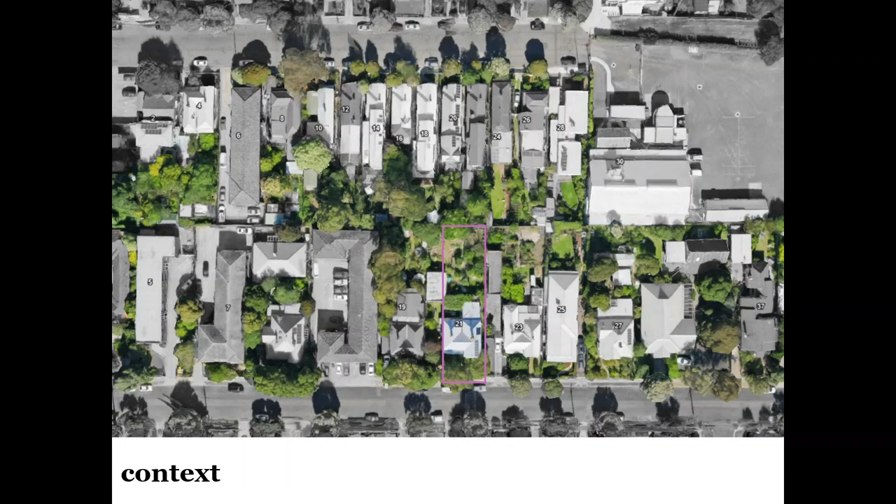Context again, suburban house in Northcote, where you can see site coverage is actually still quite low in comparison, and it has this quite lush green band running through the backyards, which we certainly wanted our design to integrate with. So again, I'm going to talk about these things, but not in that order.

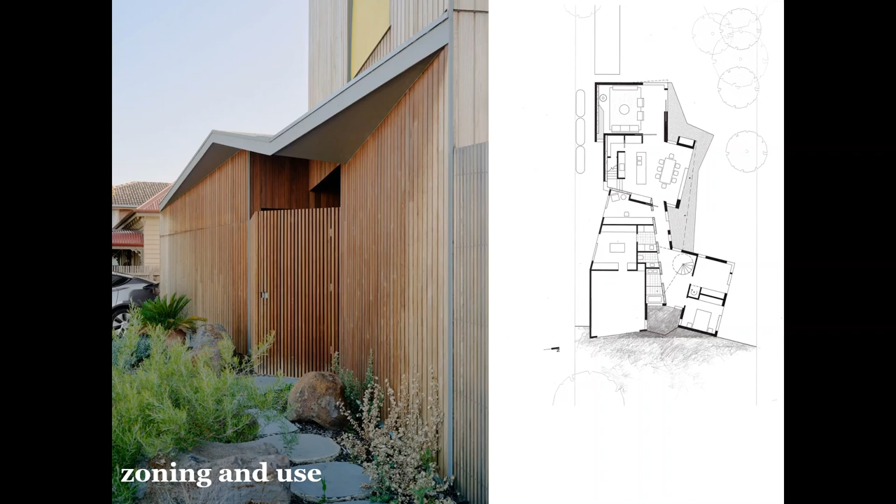So as you arrive, this is the main entrance. There is an outside lobby before the front door where you park your bikes, and that feeds a little bit into behavior. If your bike's outside your front door, you're probably more likely to use it. If it's in the back shed, you think, no, it's too far, take the car. So that's the idea. And then you enter through a double height lobby, which also works as a thermal chimney.

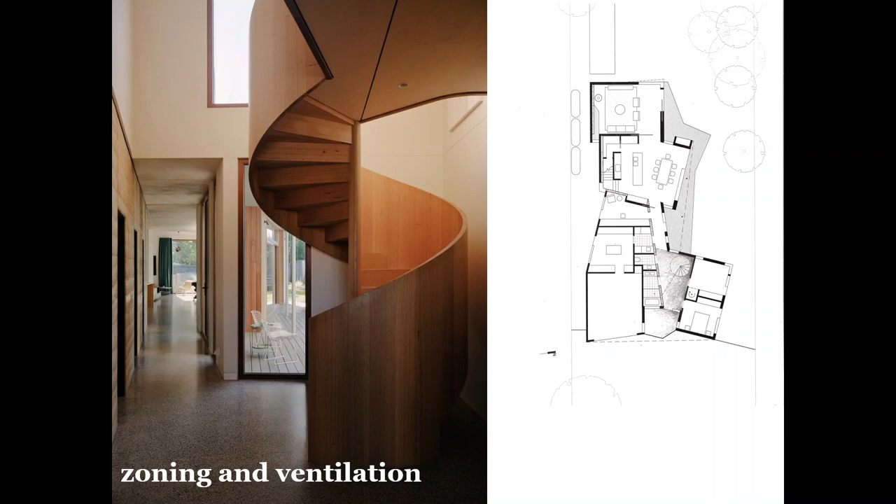The house is zoned based on passive solar design principles. Habitable rooms facing north, utilities facing south, and then there's a communal area, the kids area facing the street, then hobby room, garage, utilities facing south, and then a second floor that accommodates the main bedroom and the kids' bedrooms. So obviously, ventilation was an important consideration. Thermal mass.

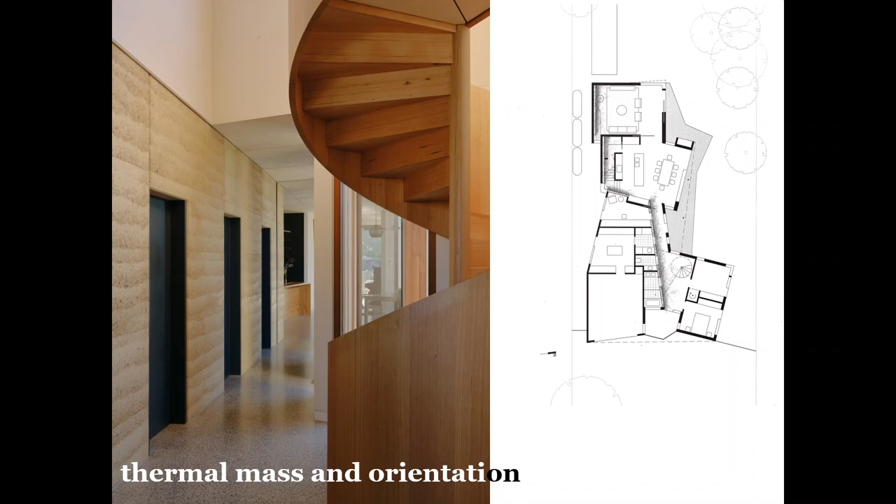I did say before, you can't always use thermal mass like rammed earth just because of its thermal properties, and you can't really sell a material based on the carbon footprint. You sell it for other reasons. Obviously a lot of people find it beautiful. It is beautiful. It's nice to touch. It has very good acoustic qualities, and it's got low embodied carbon and is very good as thermal mass.

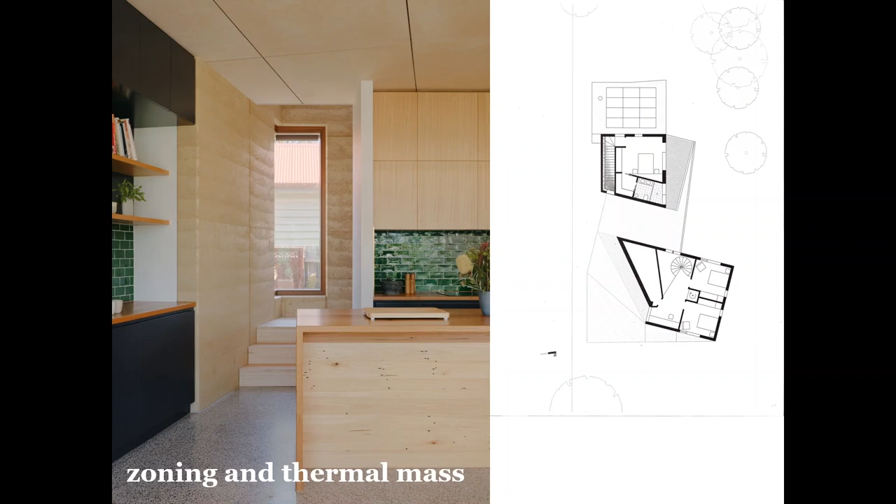So the thermal mass runs through the house, as you can see on the plan, and moderates the temperature internally. And then zoning: the rammed earth wall leads into the main living room, and that can be closed off to control thermal comfort. Parents' access is hidden behind the kitchen, a bit more private. And again, in the renders, we played with sunlight. So when you come down the stair, you experience the morning sun.

It's not a passive house, but we thickened up the walls to increase the insulation, and we also used laminated timber windows with IV68 profiles that are high performing, much better performing than standard windows. So windows with very, very low U value. In order to do that, we thickened up the walls, and there's one other reason too.

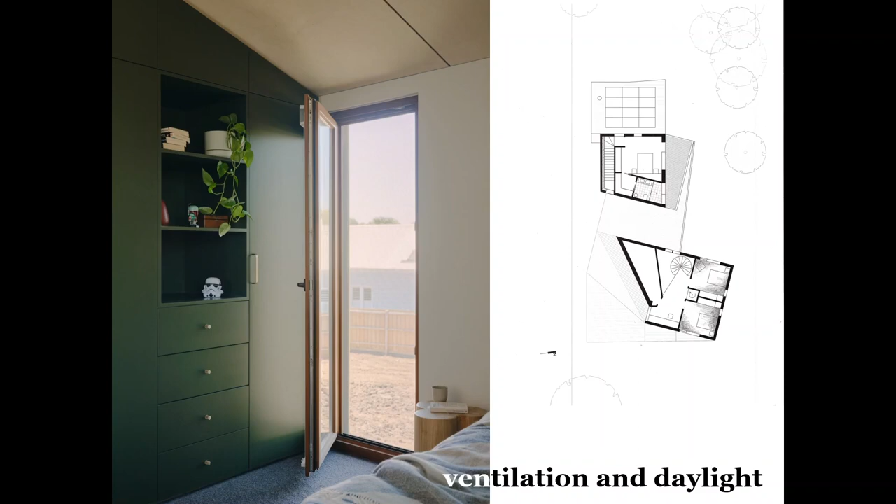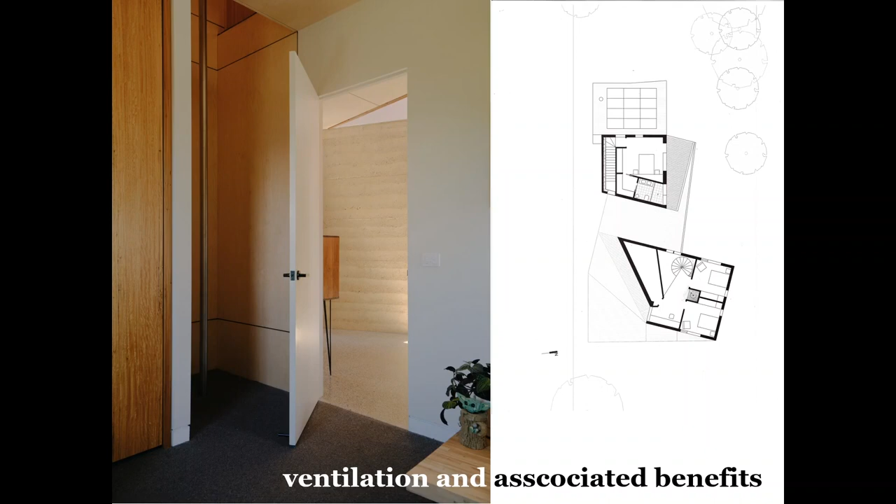Again, cross ventilation is important. You put your openings diagonally opposite, and that also means they get nice views and balanced natural light. And associated benefits: a fireman's pole for the kids to get to the rumpus from upstairs if you're in a rush. Orientation and windows, obviously very clear. You want to collect more sunlight downstairs than upstairs, so there are larger openings downstairs. And that also goes with the use: your communal area downstairs and your private rooms upstairs.

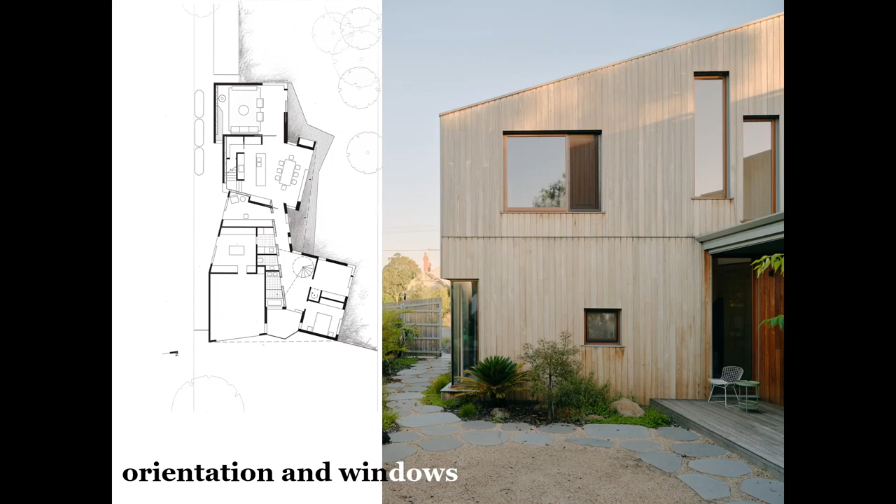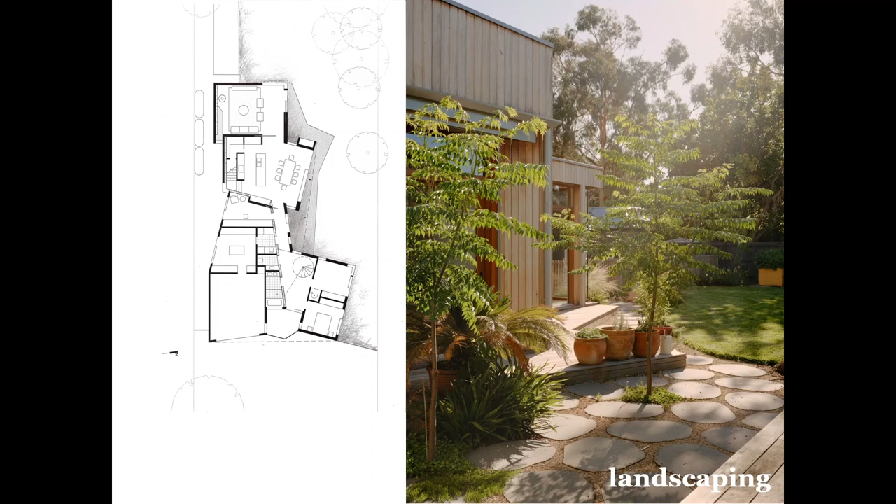There's a veranda facing north that provides shade in summer. And as you walk through the house, it integrates more and more with the landscape. The closer you are to the trees, the less house there is. It's all clad in timber, and the idea is that it actually disappears. No, it won't disappear, but it'll blend in over time. The timber is designed to grey off, and as the trees mature, it all becomes one thing. And that's the house from the back.

And important is that you can operate it. And again, that feeds into behavior. We have something very similar in our own house.

Two minutes? Okay, I'm almost done actually. So I'm looking forward to the questions. So.

The walls are thickened up, which allowed us to integrate the sun shading, and it can easily be operated, and it does change your spatial experience internally. It's similar to, what's the name of that screen? The mashrabiya. Yeah, the screen from Middle Eastern architecture. So similar to that, you're inside and you have a different spatial experience on a hot day.

And it's exactly that. When people install blinds, they ask, we want to look through, can you have something with a lower reflection rate? And I said no, the more reflective, the better. On a hot day, you don't want to look outside. It's a different experience. And that supports that idea.

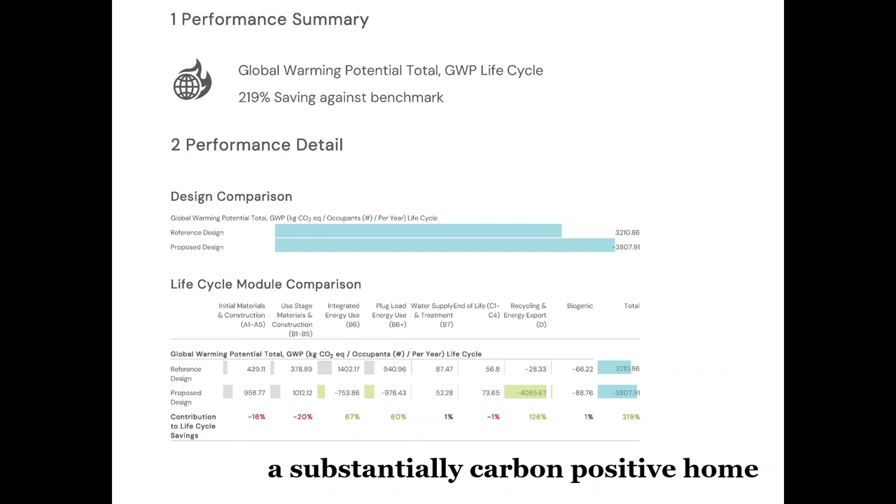And the slide you were all waiting for is the global warming potential: 219% savings. And that's actually mainly because of solar. Obviously there's the performance of the building fabric, but solar is the main contributor. Which was an interesting experience for us, and makes us feel a little bit better having designed it. And that's the end.